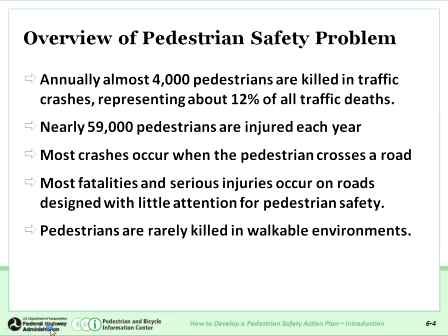So the plans and designs that you develop today are going to influence how safe people feel, but also, more importantly, how they respond. That's why this is so important, to get those designs right, to get people to react in the way that we want them to.

Maybe some of your agencies have been doing this for quite a while, but those plans have helped get the numbers down. But some people wonder maybe the numbers have been coming down because there's less people walking. The roads have been getting, in some areas, pretty bad, and maybe people are feeling less safe, so there's less walking going on, maybe, and therefore fewer fatalities.

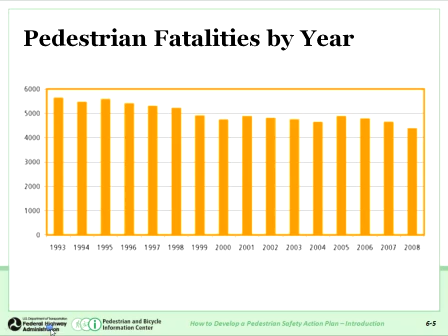So we are back on the downtrend, and hopefully it stays that way. But it's still way too many lives being impacted. And something else we should remember is the Americans with Disabilities Act, or ADA requirements. When people are injured, we need to provide facilities capable for people in wheelchairs and for the blind. So we will be discussing ADA a little bit as well through this series.

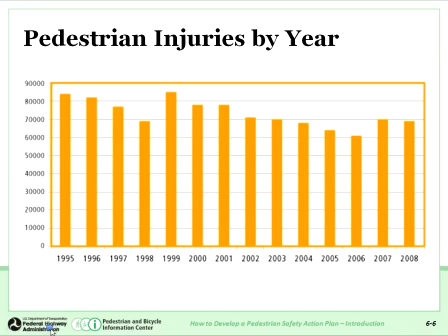So why is it important to accommodate pedestrian safety and accessibility? Well, whether for pleasure or exercise or just getting somewhere, most people make a walking trip in a day. Maybe it's just from your parked car to the entrance of the building. But walking is the oldest form of transportation, and at some point we all are pedestrians.

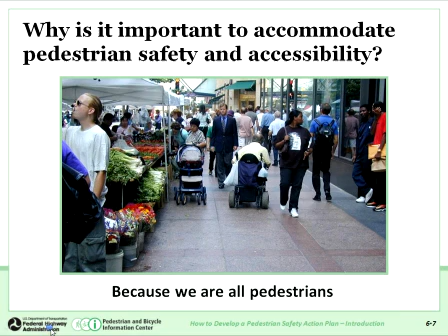Another important reason to accommodate pedestrians is because a large segment of our society doesn't drive, or maybe can't drive. Whether they're disabled, maybe they can't afford a car, maybe they're under 16, kids who don't drive. But then there's a good portion of the population that just chooses not to drive, maybe due to gas prices or high cost of parking, various reasons.

But somebody did a calculation once, based on the census, and figured out that about 33% of the population doesn't drive. So if you're not considering pedestrians in your designs and your plans, really you're leaving out about a third of the population.

Now, there's other modes of transportation, like transit, that's dependent on good walking environments. Basically all transit trips begin and end with a walking trip. So we really need to pay special attention around these areas.

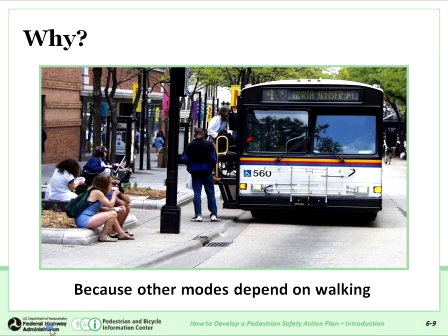A good walkable urban environment is good for business as well. Here in Olympia, many of us in our office will take a break down to the coffee shop, or go out for lunch. In Olympia, we have a good walking environment, so we can do that.

But I know that in some offices where I've visited and talked to people, they don't go out very much. They'll actually jump into a car to go get coffee or go to lunch because they really don't feel safe walking to their destinations. So once again, the designs we make and how we plan and build things will affect human behavior.

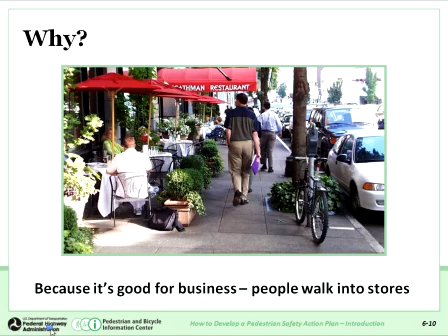Another reason to accommodate pedestrians is health. Walking is a great form of exercise, and when can you not turn on the news and hear a story about the overweight problem in America? Creating a good walkable environment can help that.

We're really partnering up with a lot of agencies across the country. The health community is really jumping on board and supporting our efforts to create good walkable, safe environments. We shouldn't be designing streets just for one group of users.

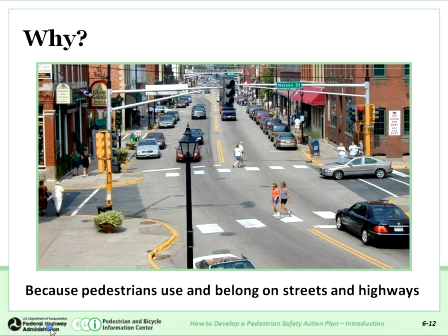Pedestrians are a vital element of street design, as well as bicyclists and other modes. Pedestrians belong, as well as vehicles, but we need to accommodate all modes of travel.

The other aspect I'd like to bring out is that we say it's good for all, safer for all road users. The different countermeasures we'll be presenting throughout this series are not where there's an imbalance, making it unsafe for one mode versus another. All the safety countermeasures we're going to talk about for pedestrians don't make it less safe for vehicles.

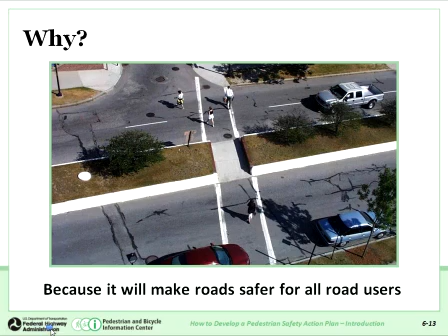So really, it is, in some situations, a win-win situation. Especially in the engineering countermeasures, for example protected left turns, it's a win-win for pedestrians as well as for vehicles. So really it makes it safer for all road users.

And then AASHTO, many of you who do designs know the American Association of State Highway Transportation Officials. They have a green book, and in this green book it says, because of the demands of vehicular traffic in congested areas, it's often extremely difficult to make adequate provisions for pedestrians, yet this must be done because pedestrians are the lifeblood of urban areas.

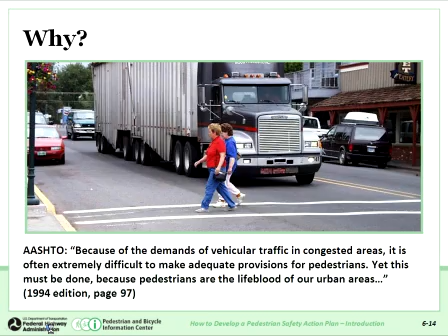So really, agencies are on board, realizing that we do need to accommodate pedestrians. And finally, really, it's because it's the law. Secretary LaHood, on March 15th, sent out this policy statement with regard to bicycle and pedestrian accommodation.

It's really that every transportation agency has the responsibility to improve conditions and opportunities for walking and biking, and they need to integrate walking and bicycling into their transportation systems.

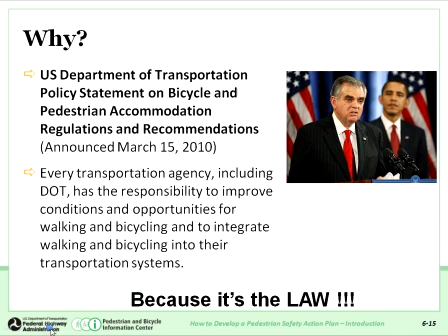Okay, and basically this policy statement, these are the highlights. It says you need to consider walking and bicycling as equal modes with other transportation modes. Pretty bold statement, but the Secretary stands behind this, and it's a game changer, basically, this policy.

But we need to also ensure convenient choices for people of all ages and abilities, and go beyond just minimum design standards. We always remind engineers that although funds are tight and they say we can't, we need to go with the minimums. Really, you do need to look at going beyond to really make an impact on safety.

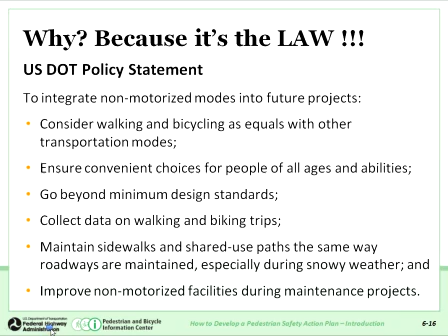And collecting data on walking and biking trips, we've been doing that for cars for a long time now, but we want to do that for pedestrians and bikes too. And maintaining sidewalks and shared paths the same way that we do for vehicles, especially during snowy weather, and improving non-motorized facilities during maintenance projects as well.

So go to these websites, check them out. All the information we were presenting and more can be found at these websites. So with that, I'm going to turn this over to Paul and Ryan, and they're going to talk about the planning and street design elements, the land use, street connectivity, access management, site design, and level of service.

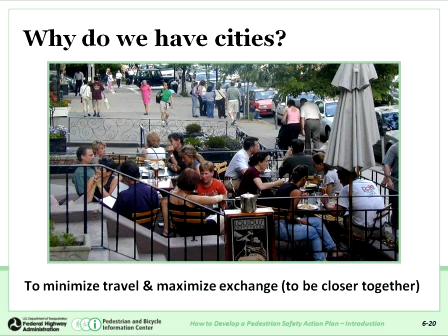Why do we have cities? The reason we have cities is really to minimize travel and maximize exchange. So having land uses close together where people can walk makes for a walkable environment. When things are located far apart, it necessitates getting into cars.

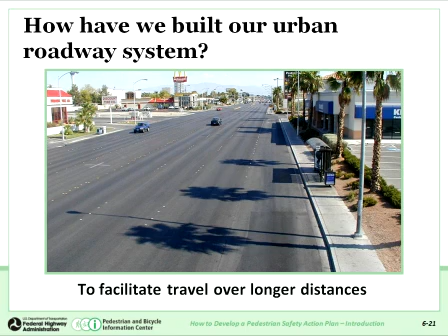How we built our roadway system—our roadway system, to a large degree in many areas, particularly in suburban areas, has been to facilitate travel over longer distances. We've created these wide, large arterials that transport people long distances, but we have, in the meantime, sort of forgotten the destinations themselves.

Reducing travel demand can really be best achieved by changing land use policy. When we think of transportation, it's really movement from one land use to another. So the way we arrange land uses impacts the way we travel, whether it be from home to work, home to school, or from work to the store. Arranging these land uses in a way that facilitates walking is really the first part of transportation planning and creating walkable neighborhoods and communities.

So when we've segregated land uses and created land uses that are far apart, one of the things we can start to do to retrofit is to start to allow small-scale retail into neighborhoods, to reintroduce neighborhood schools, and to reintroduce some neighborhood parks.

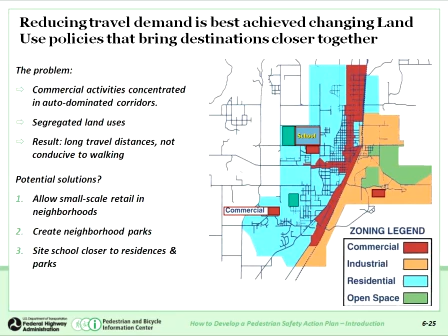With neo-traditional development, sometimes called new urbanism, goes by a number of different names, we're trying to get back to the way that things used to be done when cities were developed under the assumption that people would walk wherever they go. So destinations are close to residential areas. Schools and parks and stores and work sites are all close to one another. And that's what we're trying to do with this sort of new smart growth or new urbanism.

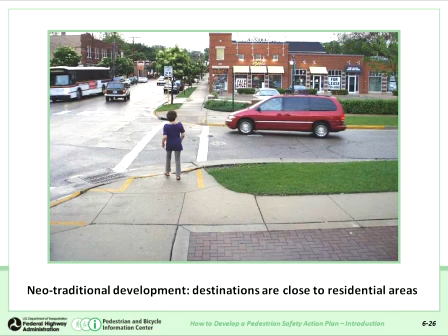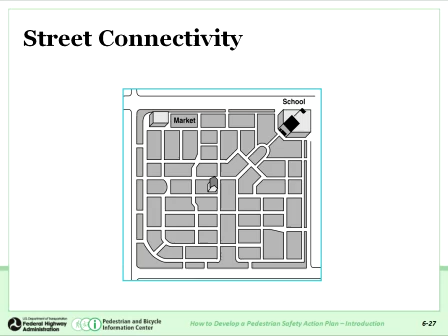Street connectivity is a really important part of this. The DNA of our cities is really our land use planning and our street network. So street connectivity is really the bones of our communities. And what's best is interconnected streets with small blocks.

In this example here, we can see how connectivity creates a pedestrian-friendly street system by reducing the walking distances and offering more route choices and dispersing traffic, as compared with the lollipop pattern or the cul-de-sac suburban model, where things are separated and to get from one place to another, one has to go along a circuitous route, as we see in the diagram there.

And so what happens so often is that people would, instead of walking from home to the school or to the destination, would get in a car and drive. So this puts more cars on the street. This travel pattern also necessitates going through more intersections. And the more traffic we dump onto these fewer streets, the more hazardous these intersections are.

So someone would have to make 3 left turns. If someone were on a bicycle, those would be busy intersections, and probably many people are not going to bicycle, particularly younger children.

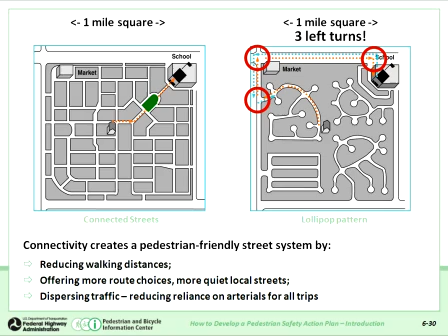There is a way to help retrofit some of these cul-de-sac neighborhoods. In some areas like Davis and other communities, they're actually creating new links between the ends of the cul-de-sacs. And this does help reduce the walking distances, so things are close enough where people can start to walk.

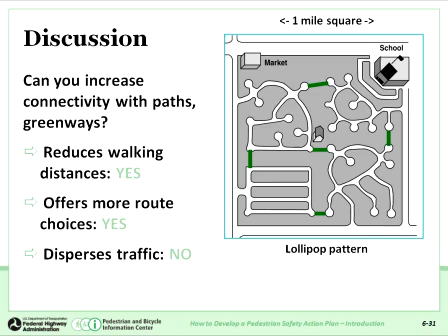It offers more route choices. The main disadvantage is that it still does not disperse traffic, so the cars are still going to be dumped onto a smaller number of larger streets.

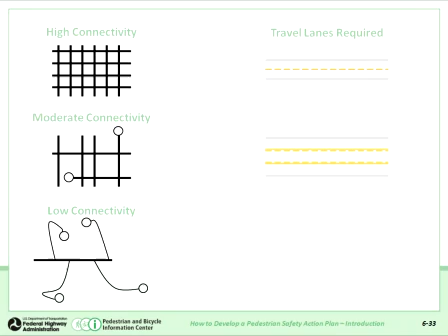When we have high connectivity, we don't need many travel lanes, so we can keep traffic dispersed and we can get by in many places with just 2-lane streets. However, when we start to have less connectivity and fewer streets, we need larger streets, we need more turn lanes, and they become more difficult for pedestrians to cross, and they become faster streets.

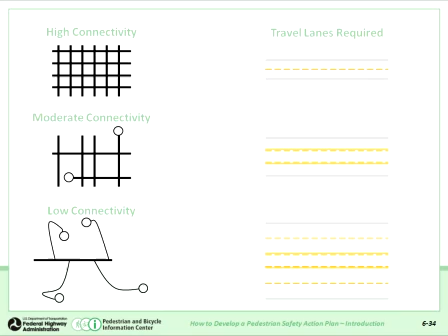When we get to the lowest level of connectivity, we're in a situation where we have dumped all of the traffic onto a very small number of streets, and so we've got these wide, high-speed boulevards and arterial streets with many travel lanes and wide streets and turn lanes that are extremely difficult to cross, and they would also have few points for people to cross.

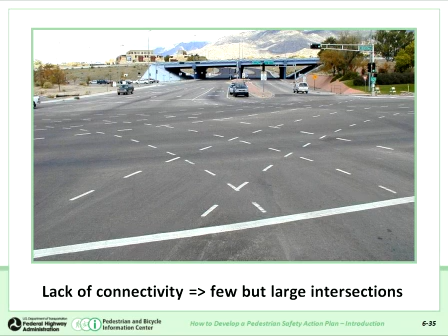And that leads us to a situation where we'll have these intersections of large streets, and these kinds of intersections are very difficult for really anybody to cross. They're not only more dangerous, but less inviting, and certainly when we think of our more vulnerable users, whether that be children on their way to school, senior citizens who walk slowly, or disabled people, these kinds of intersections really become barriers that many people will not dare try to cross.

In Davis, they've used a different model where some of the new developments have created a network of trails between the cul-de-sacs. This means you can get around Davis pretty well on bicycle or by foot without having to use the streets. So it's a pretty good situation for connectivity for pedestrians and bicycles. It still has the disadvantage of having a smaller number of streets, so traffic isn't dispersed - it's still concentrated along a few streets, so it's not ideal. But this system works fairly well, and it actually converts a significant number of auto trips into bicycle and pedestrian trips, capturing many of those.

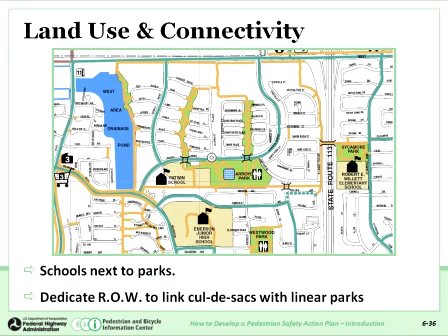Hey Ryan, this is Paul. I can see the screen. You're back up and running now? Okay, back up and running, yeah. Okay, I think we're just about ready to go to your slides. Exactly. Okay, and if you want, I can do the next 2 modules, and we can go back and forth a bit.

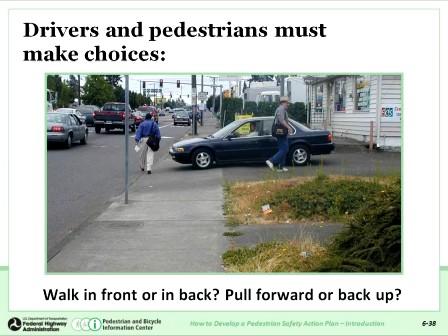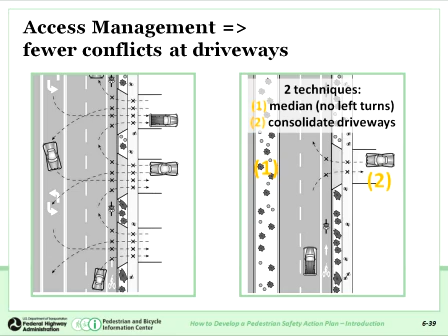There are 2 techniques we can use to address these conflicts. You'll notice on the left side of this image, all the X's indicate points of conflict at driveways, both with pedestrians and bicyclists. With pedestrians, there are 4 points of conflict for motorists both exiting from and entering into that driveway. So that's a significant number of potential conflicts.

So there are two ways to address that. One is to try to consolidate driveways. By consolidating them, instead of having 3 driveways here that each have 4 conflicts, we're reducing that to only 4 instead of 12, let's say. Of course, the challenge is getting businesses and property owners to consolidate a driveway is not easy to do - it takes real effort. Most landowners and property owners, once they have a driveway, are reluctant to give it up. It does happen occasionally, and it's something you need to work with property owners on, particularly on streets with a lot of driveways.

The other way to address these conflicts is to put in a median. What the median does is eliminate both the left turns out from the driveway and the left turns into the driveway or property. By doing that, instead of having 4 conflicts at that driveway, you reduce them down to 2.

Now Ryan, we've both asked folks in our classes which they think has the greatest crash reduction factor - putting in the median or consolidating the driveways? I often tell folks it's a bit of a trick question because we haven't really gotten into the substance of the course yet, which will give you the answer. But what's been your experience in terms of what people usually guess here?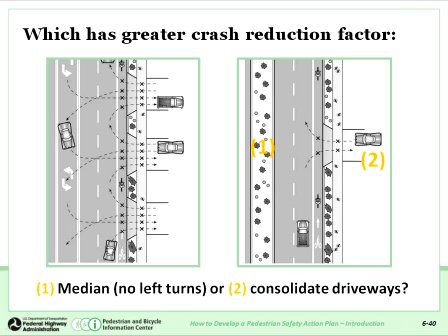It's something you have to negotiate with them. And I think one important thing about putting in a median is that it really does add to the beauty of the street. It gives you a place to put in landscaping, makes it a more attractive street, and those are some of the trade-offs you can discuss with property owners in promoting these types of solutions.

We just talked about how important connectivity is, and how we want to avoid breaking connectivity, although there are occasions when that will be done. If you have to do that, the important thing is to try to maintain some connectivity for pedestrians and folks not in their cars.

Even if you see this image on the right, where a non-traversable barrier has been put in, that really has broken connectivity. Since pedestrians only walk at 3 miles per hour, if you make the distance of travel much greater by blocking off a point of access, you really eliminate the chance that people in that neighborhood will walk to their destination. It just makes it that much more difficult.

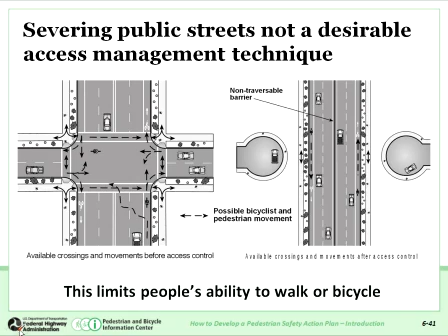If we go to the next slide, you'll see some of the ways you can still restrict access. Even when you have to sever a street, as in these cases, or build with a cul-de-sac pattern, try to maintain connectivity at the end of those severed streets for pedestrians and bicyclists, so somebody walking or riding a bike doesn't have to go all the way around and travel a much longer distance to get to their destination.

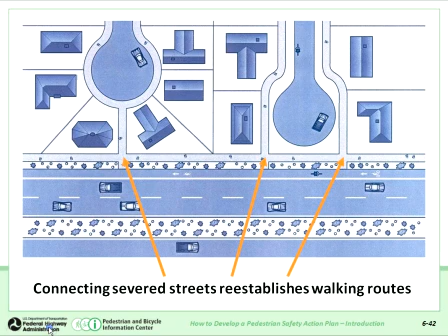And even getting to a bus stop — exactly, bus stops are very important. Often on these types of roads, the bus stop will be at a mid-block location or a place like that. Here we see an example of a city that has done that at the end of a cul-de-sac: cars can't go through, but pedestrians do have access points.

Earlier, Ryan, you showed that image from the city of Davis in California, which has actually designed neighborhoods so that at the end of the cul-de-sacs there are openings that connect to a trail system getting kids and everybody to a lot of destinations, especially schools. They've also built their system so that when those trail networks cross a major roadway, they'll often have an underpass or overpass, so kids don't have to cross busy streets when on bicycle or walking.

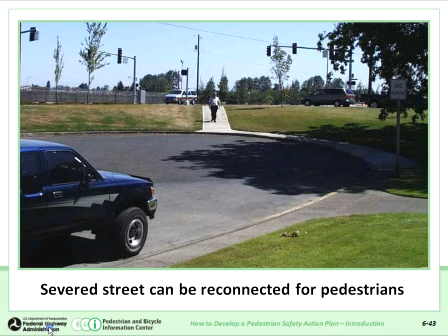So, Ryan, do you want me to do this one? Sure, you took the first two, we can go back and forth. You want to do the next two? Okay, sure.

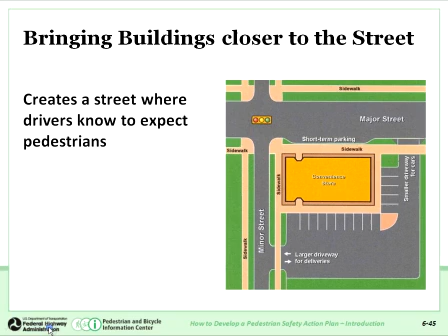With site design, what we're talking about is really where the buildings go on the site. For many years, we've seen buildings set back farther and farther from the street, where the parking is put in front of the building. This really is not a pedestrian-friendly design; it's not a particularly comfortable thing to walk by these types of properties.

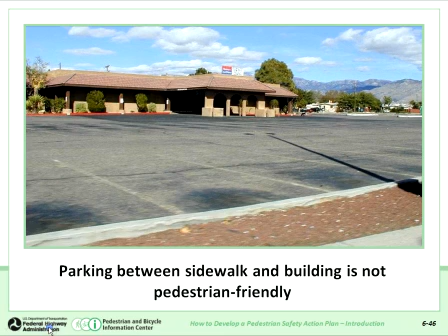Of course, part of that is also getting the street to behave. I've been told many times that when you have a big, wide arterial street with a lot of traffic and noise, the buildings are not going to feel comfortable being close to the street. So there's really a give and take that goes on with the street. But by bringing the buildings to the back of the sidewalk, you start changing that street and slowing the traffic down, creating that sense of enclosure that really tends to work.

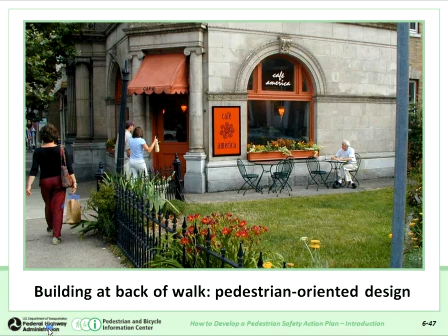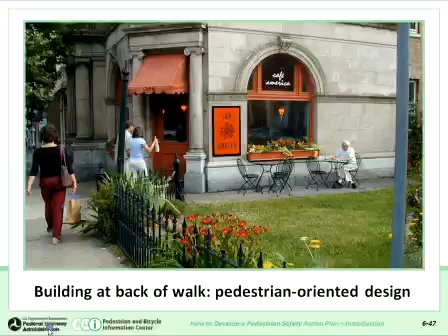It's the kind of place that you want to get out and walk. It's the kind of place that you would travel to on vacation. It's the sort of neighborhood that you would bring your friends from out of town, out of state, or out of country to visit and show them your community, as compared with the slide before, which is something that's completely uninviting. It's not the kind of place where you would take your friends from France to visit and show your community, or a kind of place you'd go on vacation. So it's just not a nice place to be.

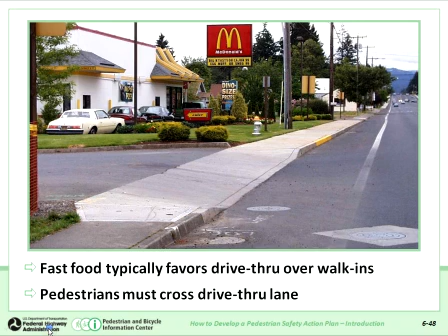Walkable communities are inviting. Exactly. And in this image, one of the things we're often challenged by is land uses like fast food that want to have the drive-through right between the sidewalk and the building. Again, this is not a particularly good design. We want to try to get the drive-through to not basically be in that line where people are walking into the store. I guess on the plus side, at least people coming out of those drive-thrus are going at a slow speed, so they're usually not likely going to hit somebody, but it can happen.

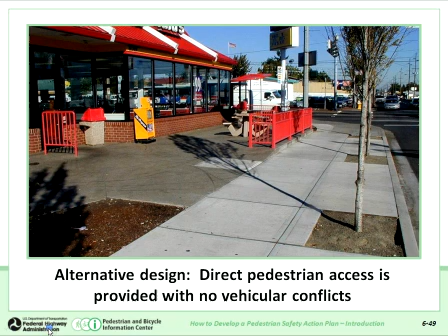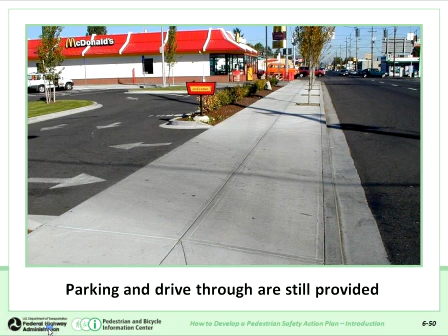But here's an alternative design. In this case, the same type of restaurant, which will go unnamed, is built right up to the edge of the sidewalk with an entrance from the sidewalk. And there is a drive-through, and we'll see it in the next image, but it's in the back, on the side. It's not right in the front. So here you see where the drive-through access is, and it's not interrupting or getting in the way of people actually getting into the building, without having to traverse the drive-through lane.

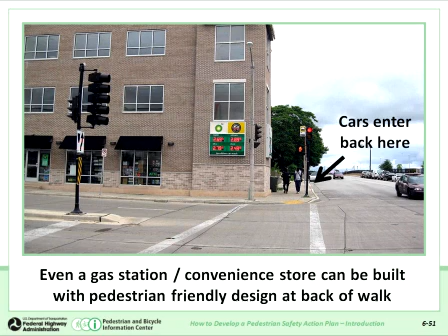Right, to the unnamed restaurant. And the next example is actually a pretty radical one here. There's actually a gas station convenience store behind this building. I mean, something we don't see very often, but we're starting to see some cities, particularly in the more urbanized parts of those cities, require or insist that if you're going to put a gas station, you don't have to have a big blank asphalt pad on the corner. You can actually locate it behind the building. In this case, I have a sign right on the corner that people can see, and of course folks who live there know where the gas station is. But this, of course, is a much more pedestrian-friendly gas station design than what we typically see around the country.

What we're also seeing more and more is retrofitting of shopping centers, and I've seen this in my work. I think it's part of as these shopping centers, which typically have a life of about 15, 20 years, get rebuilt, they have to take steps to meet ADA requirements, the Americans with Disabilities Act. So they will retrofit their site to actually install a pedestrian access way to the building. It's not the ideal we'd like to see, if the building's actually lining the back of the sidewalk, but at least we're starting to see a little bit more thought given to how to get into the building from the sidewalk.

I don't know, Ryan, you've got a lot of these types of uses down in Los Angeles. Are you seeing this kind of retrofitting over time? I'm not seeing a lot of retrofitting. I'm seeing some new buildings with some better designs.

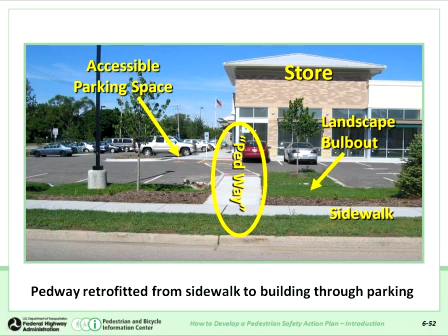We're starting to see new designs of shopping centers where they're really doing a much better job of improving the pedestrian experience, having walkways through, some shading and landscaping, breaking up the parking, so instead of one big massive parking lot, you see smaller groups of parking in different areas of the site. I think although all those things are good, as long as there's good visibility for the pedestrian trying to get to the stores, that's important. Slowing down the speeds, raised crosswalks, all of those things can really help.

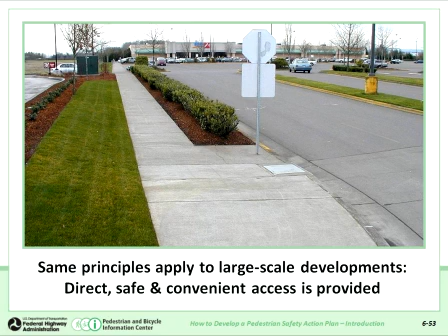Here's a large-scale development, we'll go unnamed, where a lot of times you'll see these sidewalks that just end when they encounter the driveway for the big box store. In this case, they actually have provided a sidewalk all the way in from the street, which I think is commendable. Those are at least the types of things we want to see with some of these types of uses.

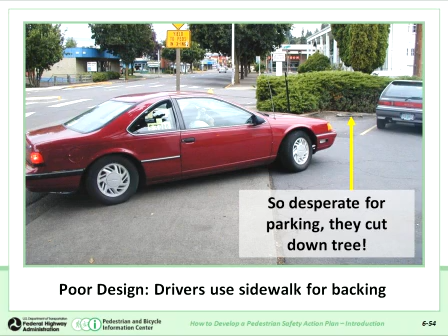In this case, you can see, as the little note indicates, that they were so desperate for that one parking space that they cut down a tree there. Clearly, the tree should have stayed, and that parking space should not have been added. You don't want drivers either backing up over a sidewalk or a crosswalk where they're likely to encounter a pedestrian. If you'll notice in that picture, there's also a visibility issue with the shrubs there. So somebody backing out of that parking space couldn't see a pedestrian walking by from that side. Yeah, a lot of things not to do in this slide.

I'll continue here, and then you'll pick up a little later. So I guess what we're really talking about with some of these things is rethinking the role of urban streets. We recognize that a lot of these issues are not ones that, say, the traffic engineer or public works department will be dealing with, but they're very important to creating walkable environments. I'm sure all of you have heard the term complete street. What we're talking about is really a street that accommodates all types of users, whether you're in a car, a bicycle, on a transit bus, walking, whether you're young, old, able-bodied or not.

We really want to make sure that all the purposes of the street, and of course these streets are public, owned by the public, it's public right-of-way, need to provide for all these different uses. Mobility for all modes, access to destinations, it's how we get to different uses and needs in our communities. It's also a way to support businesses. If you have a great street that encourages people to linger and spend some time there, that supports thriving economic development and businesses in your community.

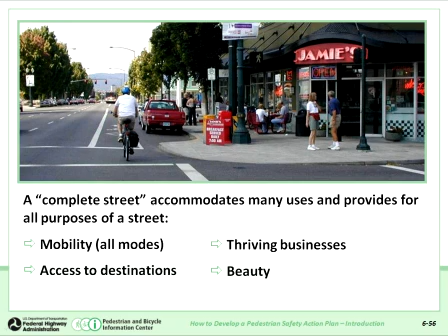Not to be forgotten is the last one, which is simply beauty. You want to make sure that you're doing everything possible to enhance the environment that people live in. Those are some of the intangibles, perhaps, but something that I think is also very important that needs to be considered with every treatment that we add to a street. We want to make sure that we're not making it a less attractive place.

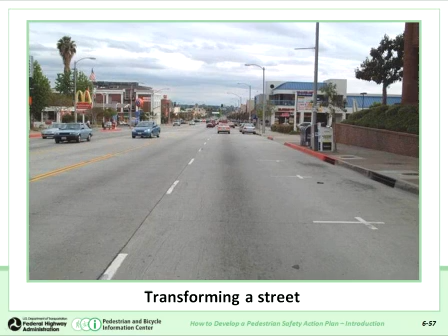So this next set of images will show how you can actually transform a street and take a pretty vanilla type street like this one - plain vanilla, just a lot of asphalt out there, not a lot of buildings comfortable near the street. So by, in this case, narrowing the lanes down a bit - and I think a lot more people are recognizing that 12-foot lanes are appropriate on freeways and at higher speeds, but in urban environments with speeds under 45 miles per hour, 10 and 11-foot lanes work perfectly fine.

So you can narrow down the lanes a bit. We don't see any decrease in safety when we narrow down the lanes, and we don't see any decrease actually in capacity of the roadway.

But by doing that, now we have a little bit more space to make the street more complete, to add a bike lane. In this case, they already had a two-way left turn lane, but they've added median sections in there and added trees. They've actually treated the parking lane a little bit differently - it's no longer just a big expanse of asphalt, they've added in a different texture or treatment for that parking lane.

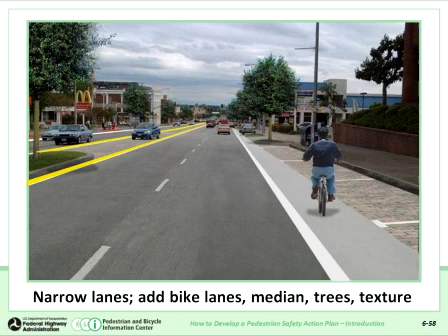By doing that, it also makes the road feel a little bit narrower. You don't have that big expanse of asphalt that makes motorists feel they can travel at high speeds. Am I missing anything, Ryan, or did I catch most of the changes here? I think you got most of it. Yeah, and adding in the shrubs, the trees and so forth, creates the feeling of narrowing of the street and slows cars down. Exactly.

And also the median island provides a better opportunity for people who want to cross the street. Right, and I think folks will hear about this in the engineering section, but we find that studies have found that medians, for example, reduce pedestrian crashes by up to 40%. So that's an important thing to consider, especially on multi-lane roads like this one - adding medians on those streets really can help.

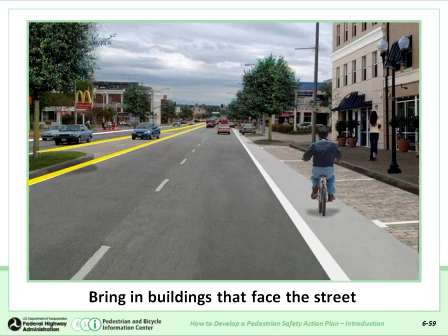And of course, once that initial change to the roadway takes place, as I mentioned earlier, buildings now feel more comfortable coming up closer to the street. So we see new development, infill development as we call it, filling in those gaps, filling in the parking lots. And I think the next slide sort of shows the final transformation.

Maybe it's one or two more, where the street now has life, safer for pedestrians. I guess the final comment would be, if it only would be this easy in real life as it is in Photoshop. But we are seeing these types of transformations all over the country, which really do create much more pedestrian-friendly environments. They also create a lot of economic value. Exactly. Yeah, something we often don't think about is how, by investing in improving the street, the local jurisdiction will often get the payback multiple times in the increased property values and tax revenue of those properties along that street.

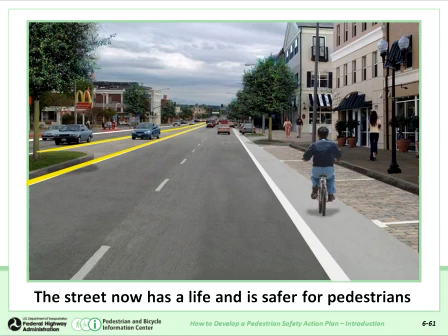So as I mentioned earlier, we recognize that these are things that may not be dealt with by road designers, but they're obviously very important things to think about. It really speaks to the need for more collaboration between public works and road designers and traffic departments and DOTs with planning folks who are the ones dealing with land uses and development. You really need to have that holistic approach, and that's often embodied in complete streets. What we're trying to do is get those different departments to work together, to be thinking about all these things jointly, so that we end up with the best possible streets that a community can provide.

And we have this question here. I think what we find when we go into a community and work with them is that often there are ordinances that support some of these things, but they may be scattered in a variety of different documents, and they may not be clearly spelled out as emphasizing the need for, or supporting, pedestrian-oriented planning and design.

And Ryan, I don't know if in your experience you find that more often than not, communities already have these types of policies. Yeah, certainly most cities I work in, their general plans have some pretty good policy language when it comes to creating walkable communities and pedestrian orientation. It really is a matter of sometimes not realizing itself through all of the zoning and building codes, and some of the more details that are needed to have it become reality.

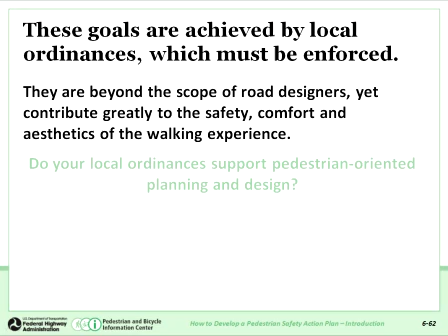I think one of the things we encourage communities to do is to actually look through their different planning documents, look through their street design standards, and make sure everybody understands what's in there. And then if things are missing, develop the policies or ordinances needed to fully support pedestrian-friendly design. I guess we can move on.

Yeah, one last thing that I'll talk about, and then I'll hand it back to Ryan, is levels of service. I'm sure a lot of you, especially if you're in the transportation world, deal with that regularly, and how to think about that when it applies to street design and pedestrian safety.

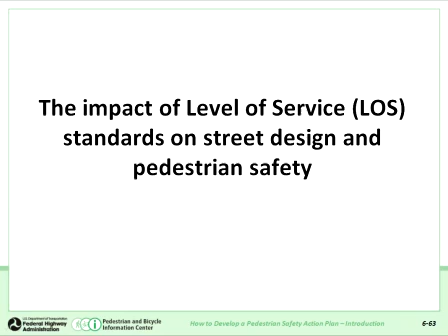I think one of the big problems we've had over the years with levels of service is that by setting up this A to F system, it sounds too much like a report card, and we just shy away from getting anything below a C, right? You're going to get in trouble if you come home with a report card that's a D or F.

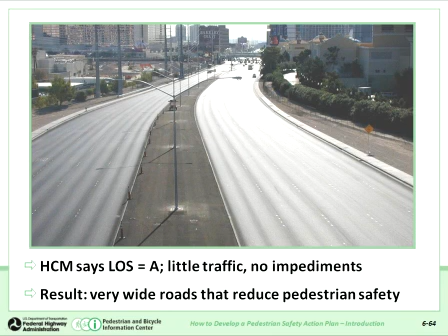So Ryan, I don't know if you want to comment on this. I guess we can go to the next image and then have a little bit of a discussion. The highway capacity manual also has a pedestrian level of service, and again, it would say this is A because there's no impediments. But in reality, we need a different way to measure pedestrian levels of service that really reflects the quality of the walking experience.

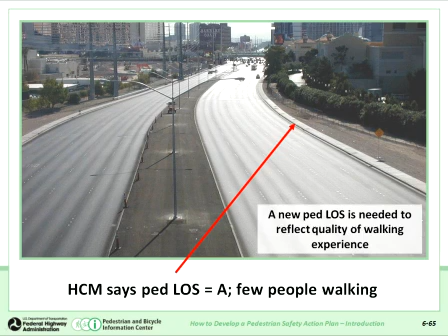So I think you'll probably be hearing about this in the other sections of this series. In the new highway capacity manual, there is a new multimodal level of service that does try to take into account how the design of the road impacts not just the movement of cars, but also how it impacts the experience of bicyclists and pedestrians. It's not perfect, it has its challenges, and I'm sure there'll be efforts to refine it as the years go on, but at least it's a step in the right direction that tries to balance the different modes and address some of these concerns.

Yeah, with the new multimodal level of service, MMLOS, they're actually considering, they've got an LOS for pedestrians, bicycles, and transit as well, and they're averaging bikes, peds, transit, and motor vehicle LOS to get the complete LOS. And then there could be cases where the LOS for the motorist might even decline a bit, as long as it improves for the other users. The overall average and the overall MMLOS may actually improve.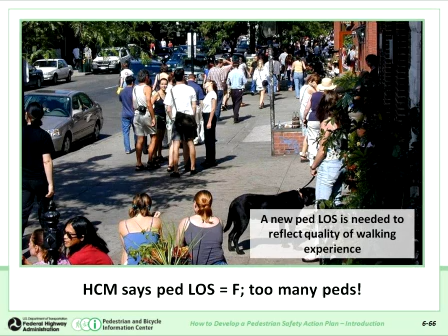If you build roads that are going to reduce levels of service to a level of service C, you end up with a road that looks like this—these very wide roads that really undermine the livability of a community. So the big message here is that we have to start considering not just levels of service for all users, but also for vehicular levels of service, we need to start accepting E or F as okay. It's a norm. It doesn't mean you get sent to your room and you failed class—it's actually the reality of how communities are developed and built.

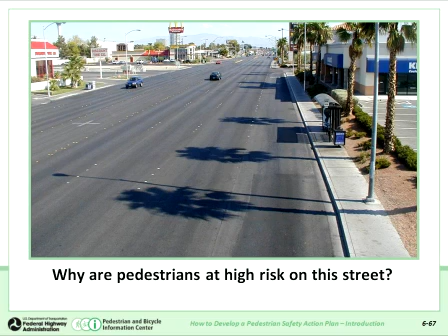Why are pedestrians at high risk on this street? As we can see, it's a very wide multi-lane road, which encourages quite a bit of speeding. Right now it doesn't have a lot of traffic on it, but I'm sure at other times of the day it does. We can see there's a bus stop right here that someone might need to cross to, to get from one side of the street to the other, and there's really no good place to cross here without walking a really long way out of the way. So most people will end up driving and putting more traffic on the street.

You'll notice also there's no way to access that parking lot from the bus stop. You basically have to walk through it to get there.

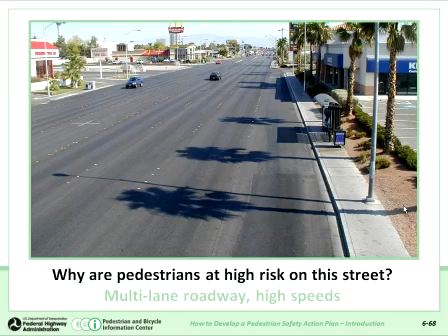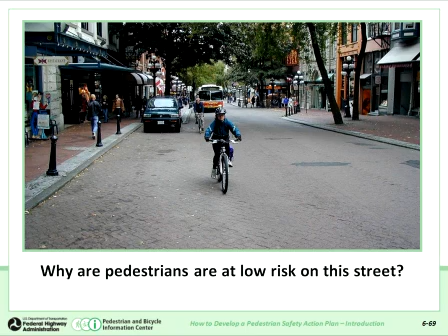Pedestrians are at low risk on this street for a number of reasons, really because the street is much narrower. There's a lot of activity on both sides, the stores are close to one another, there are people in the streets, there are bicycles in the streets, it's low speed—so there's a lot going on here, which creates what traffic engineers call friction. It's actually a nice environment, probably a better way to put it than friction in this case.

I think the issue again is speeds are so important for safety, not just for the pedestrian but also the motorist. When we do this course live, we have these little videos from Australia which emphasize the difference a motorist in a car will feel when impacting at just a 5 km/h difference. So not only are we improving safety for pedestrians, bicyclists and transit users, we're also improving safety for motorists. And this street is just a great street.

It just has so much going on on that street. Clearly the speeds are slow enough that the bicyclists just ride in the lane. And what's interesting is there's very little engineering really on the street—you don't even see lane markings.

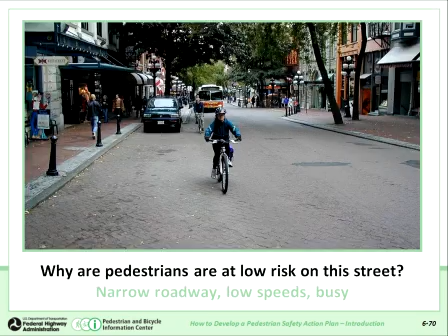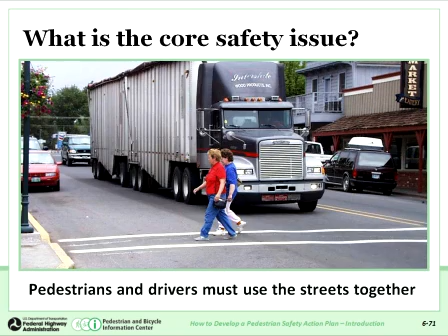We can take a lot of streets and redo them, reinvent them, and there's quite a few techniques we can use. If we take this one, for example, take a good look at this. We're going to, with Photoshop, create some changes to it and try to keep in mind what this looks like when you see the next one—what changed in the new picture.

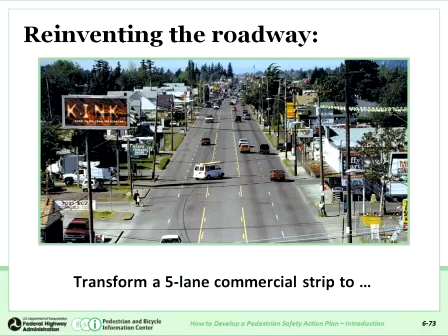It's interesting—some of these may look like high cost changes, but others could be fairly low cost. You could start out transitionally just by changing the lane markings, and then over time add in the medians and the planting, the furniture strip between the sidewalks and the street. Some of these things can happen at fairly low cost.

The lane markings are a very obvious one—anytime you're doing resurfacing, repaving, or resealing of the street, you have the opportunity to really think about how to make the street more complete and safer and more accessible for pedestrians and cyclists, by adding a bike lane or even just an edge line that moves the motorist a little bit away from the sidewalk so pedestrians feel safer.

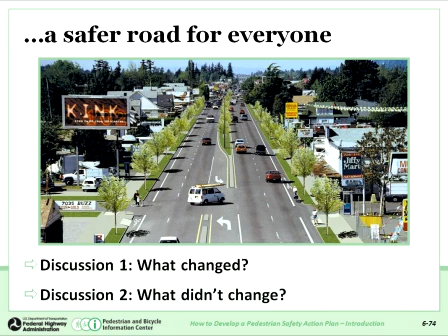All right guys, well great job. This is the last slide before we get into questions. Maybe we can just do a quick recap—I'll throw this out to you guys.

We started out with the importance of accommodating pedestrians. Why is it important to accommodate pedestrian safety and accessibility? Because we're all pedestrians—at some point in our journey, even if we're driving, we need to walk places. It's a basic form of transportation.

The public rights of way should be accessible to all. Even along a major roadway, there should be a way to get around without having to be in a car. Nowadays we're dealing with issues related to health from people being physically inactive, climate change, and all these other things. We need to encourage walking.

I think it's really recognizing that, yes, the car has had its heyday over the last 50, 60 years, but we still need to be able to get around without a car in our community. And as Ryan mentioned, the health impacts are significant—we have this major obesity epidemic in this country. We need to get people comfortable being out walking more, and walking is a basic mode of transportation.